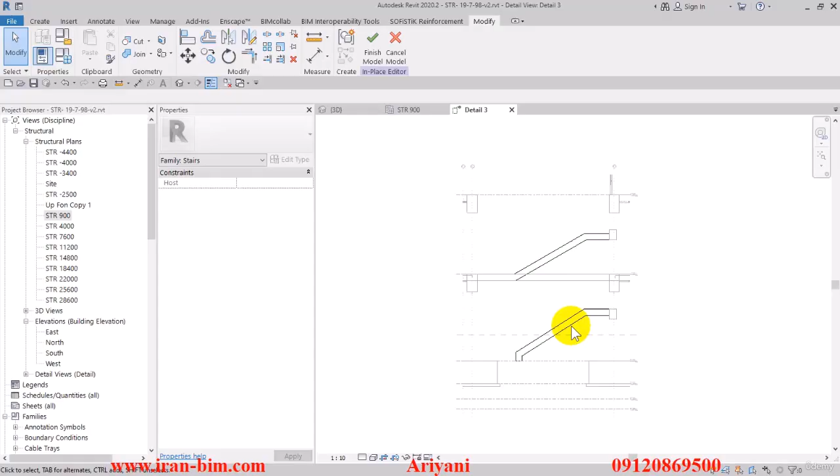I should note that you can model these in different groups as well, but because we're working under one set, we've done them together. So I'll select this, and then using move, I'll bring it right down here. Alright, then click on finish, and then I'll go here and use the extrusion tool, and then I'll set it on the reference plane of the structural level 2.

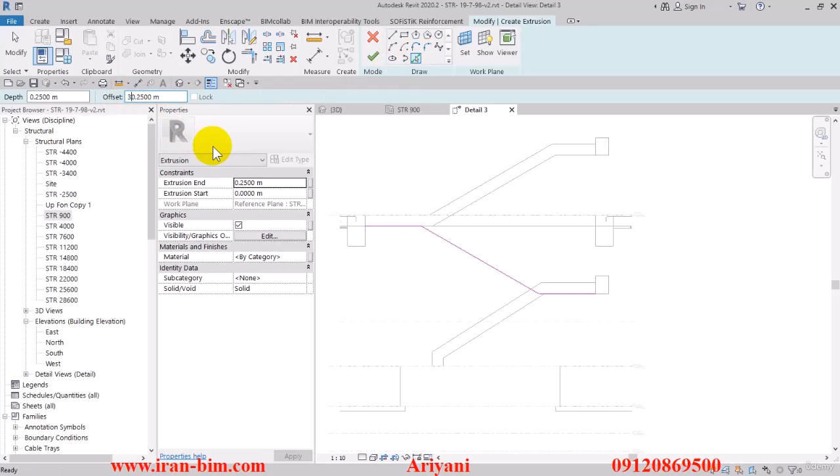Alright, and then draw from this point and type in 1.282. Alright, and then we go up here and draw for 1.271 and connect these two up, and then put the offset on 0.25, and then close the shape like this. Alright, then here put the offset on 0 and close out the opening here, and then select trim and click on here, and then trim these two as well, and then this part as well.

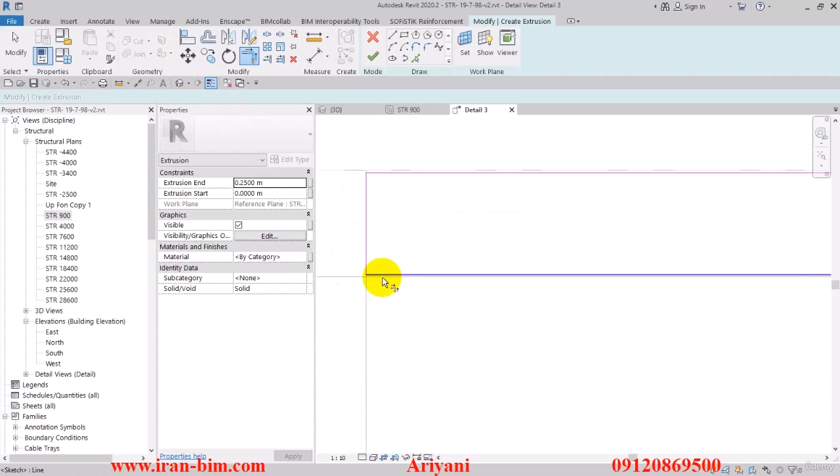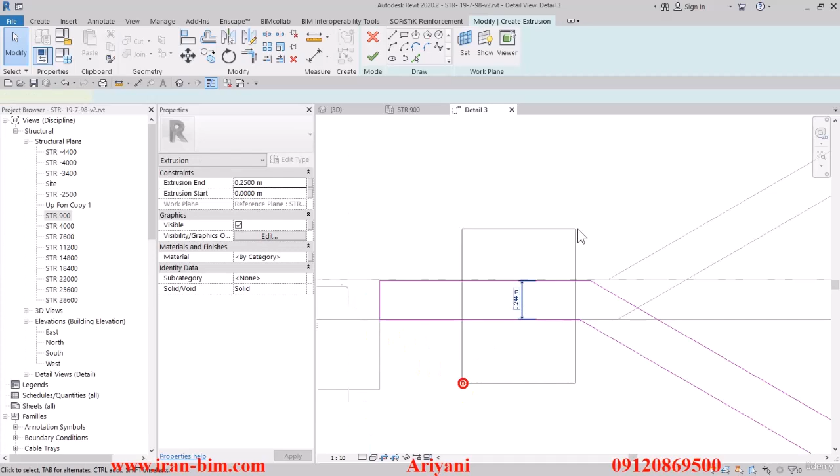Alright, I'll select this, and then I'm going to use measure to see if this actually is 25 centimeters. Alright, select the measure, and then go here, and yes, it's 0.244. So I'll select this sketch right here, then here put in 0.25. Alright, go back and delete this line, and there we go.

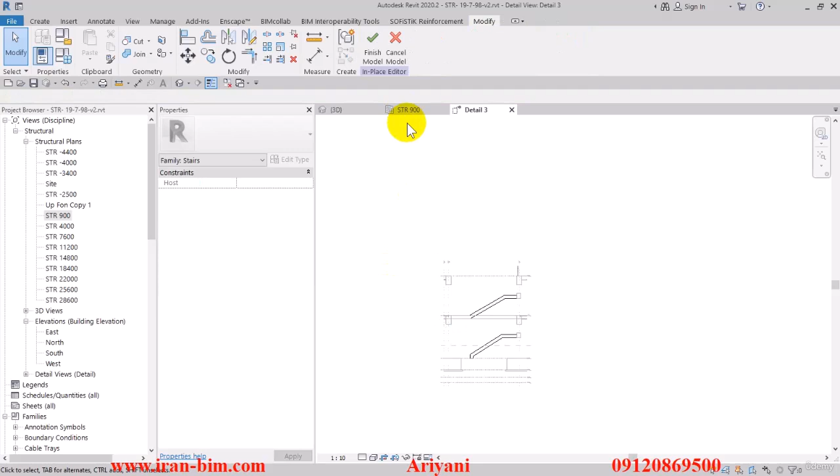So I'll select all of the shape here, and then use copy and paste it up here. Alright, now select copy again, but this time check the multiple box as well. Let me just finish this up for a moment. Alright, click on finish again, cancel, then I'll activate this area and bring it up to this point. Alright, then I'll go back to the plan, then I'll select this, and then I'll connect it to this surface.

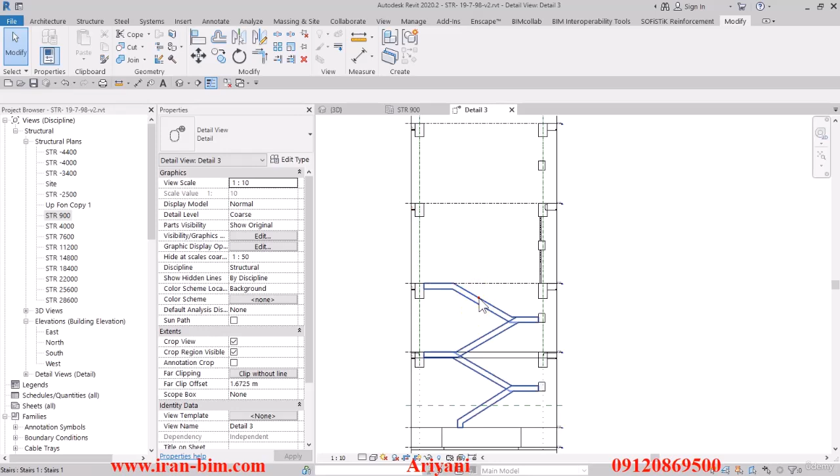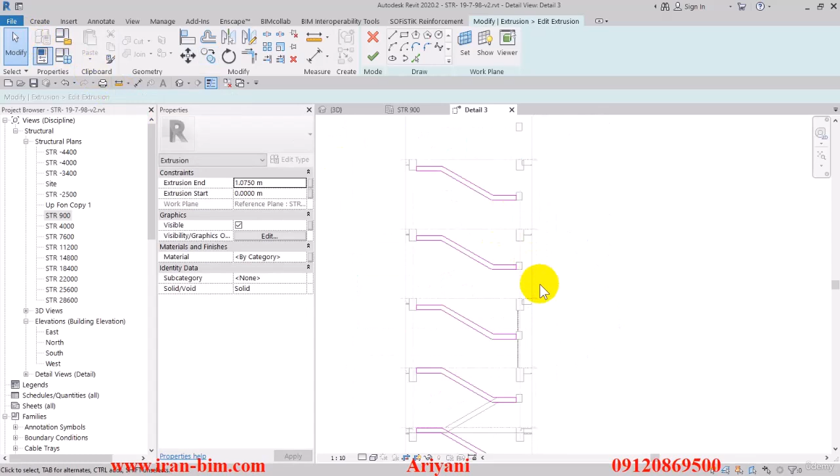Alright, then I'll select the cut line over here, then I'll bring its depth up to here, and then double click on it, and it's right here. Alright, select this and edit. Alright, and then I'll edit this top one here, copy, and then check the multiple box, then paste from here, that goes to here, and then up here, then here as well, and just repeat this process for the rest of it. That's why I said using this method is much easier.

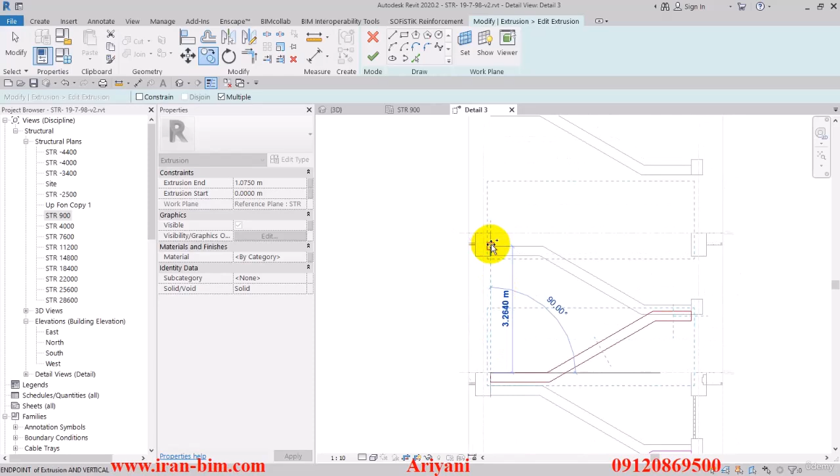Here I'll finish this up, and then for this side as well, I'll click on edit, and then select the copy tool. So this is our main beam. Select the upper point of the beam because the height may be different in different levels. And then go up here and click on this part, then paste it here as well. First, we'll need to edit this part. This part needs to be moved above the beams. If you actually take a look at it, this is the part that we'll need to adjust.

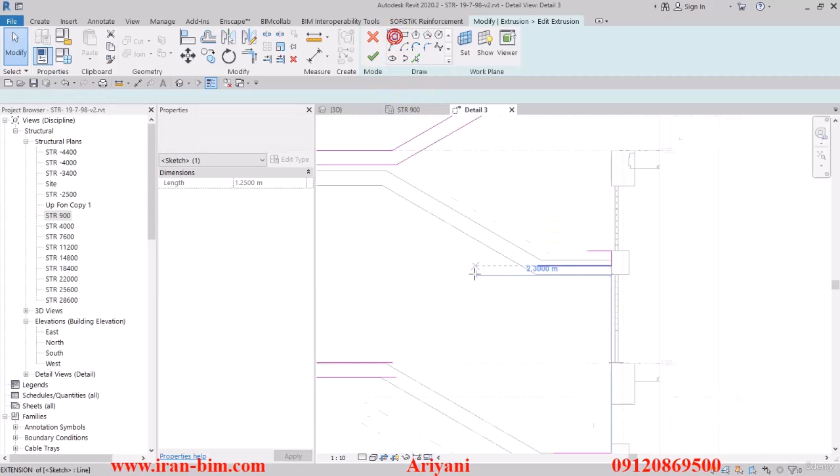I'll select this and use the move tool. Then we'll need to change the length of this part as well. For now, we'll just go with 1.25 as an example. Alright, and then connect it down to this part here. Alright, and then put the offset on 0.25. There we go. And then use trim to complete these parts. Let me just delete this part because we'll have to adjust it later as well.

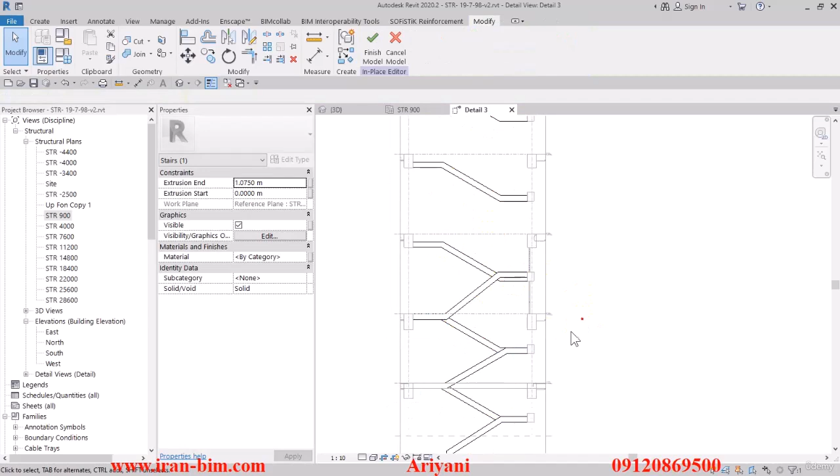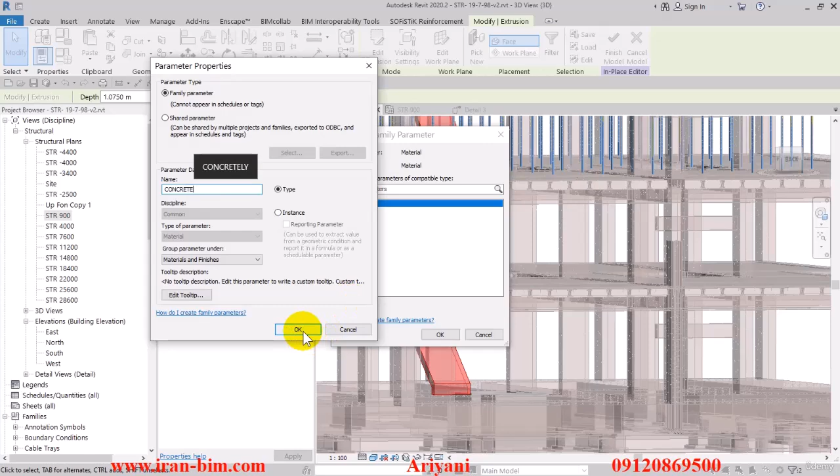So if you fix one of them, the rest are going to be done as well, because the height of these two levels was in order. And we'll need to fix this lower part as well. So I'll complete the rest of the stairs as such. Try to do them yourself too. And then we'll get to the placing of the rebars. Although now that I think about it, I can explain about rebars a bit, and then we'll do the stairs together. So I'll select these two and then give the material from this part, which I'll name concrete.

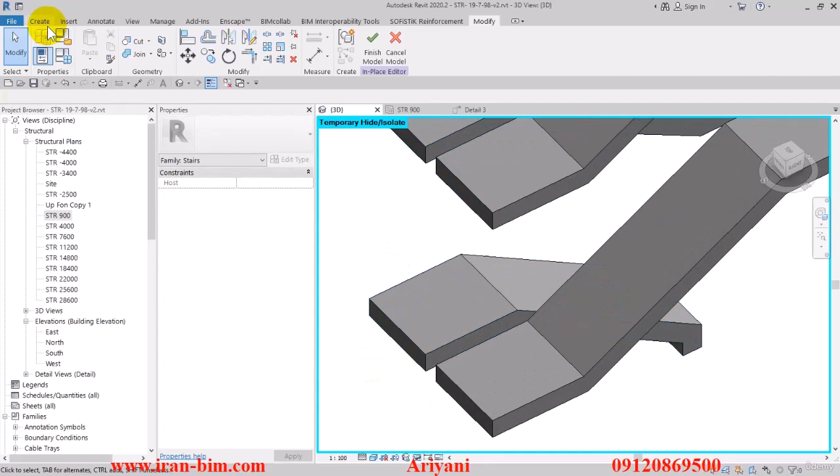I should also state another point, which is about the gap that we have here between the stairs of the different levels. If I go here and select these two and then isolate them, you can see exactly what I'm talking about. This space, this gap that we have here in the middle. You have to do this part separately. Go here and select extrusion, and then you'll set them on the horizontal face of either level. And your base is going to be from here to here.

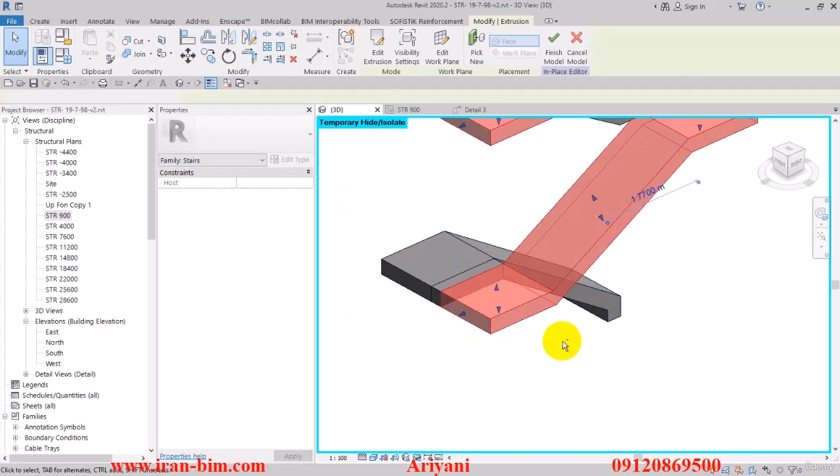So we'll finish this up, and then using a line, we'll connect these two. Do this for all the levels, and if you join them up, you can see the lines go away. And it makes a united staircase part. So now the rebars are going to be separate for this part and this part as well. I'll just finish this up for now and then go to the cut. Then we have a dowel bar here that goes right here.

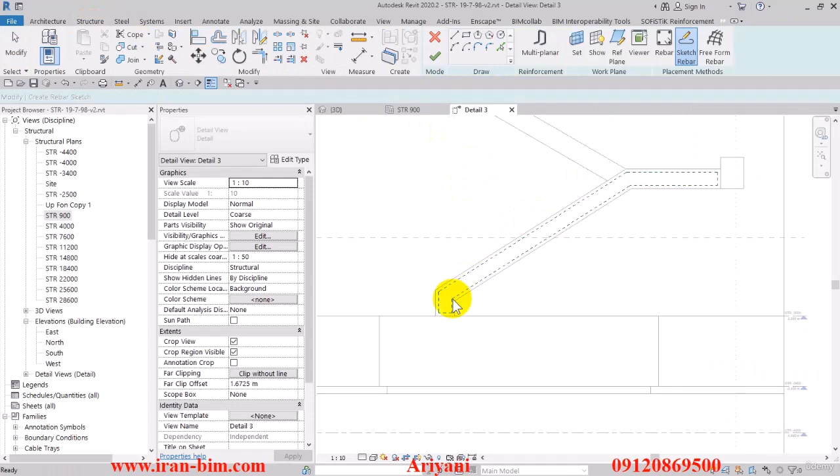So go to the structure tab and select the rebar tool and then the sketch rebar, and I'll click on this part. Alright, so then we'll have the rebar type 14. Select it from the list here, and then we'll go to the plan and draw from this point down into the foundation. Cancel. Alright, then change direction of the rotation hook, and then here is going to be our dowel bar. We'll just put the length on 0.6 for now.

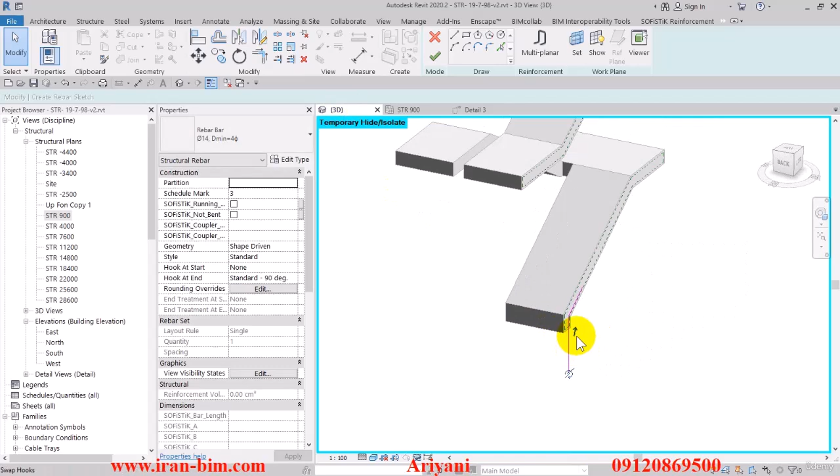Alright, let me just select this and move it a bit higher because we'll have to put this on the main rebar, and we'll place it here so they connect perfectly. Afterwards, we can adjust it as well. So the rotation hook is fine, and if you actually take a look at the 3D, it's right here.

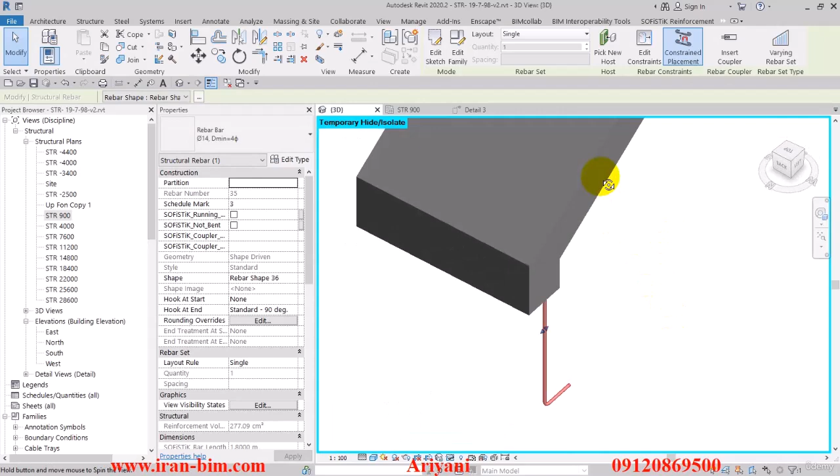So finish this up, cancel, and then from the Sofistik reinforcement parts, select the visibility menu and OK here as well. Then I'll select this. Let's see, rotate it to the top view. Here, let me just move the cut line to the inside parts. There we go.

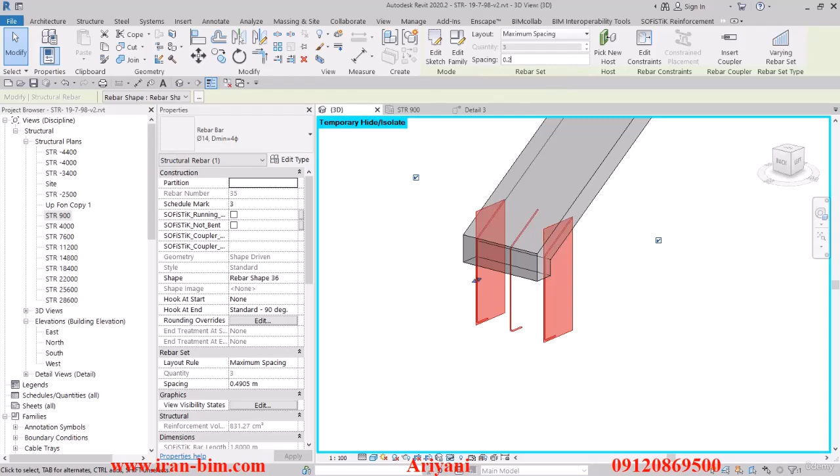And in order to see the stairs better, I'll select it, and from this part, I'll select the override option. And then I'll put the transparency on 50%. And now we can see the inside of the stair as well. So I'll select it and put the layout on, for example, maximum spacing for now. And it's going to be 0.2 meters. There we go. Let's go back to the plan.

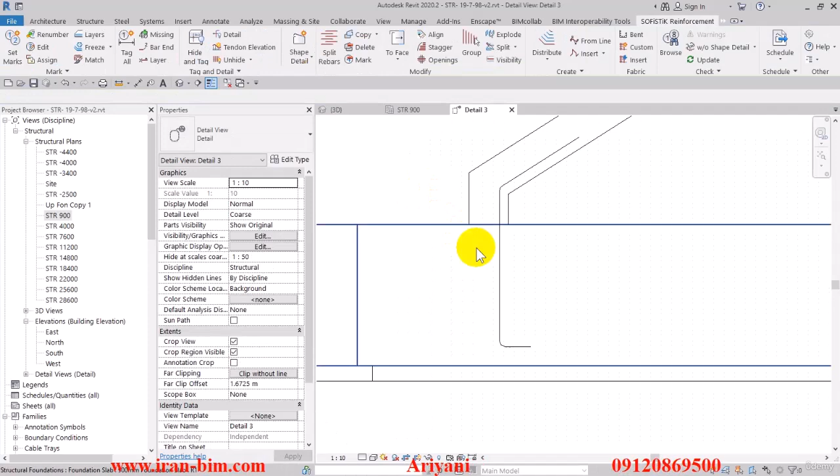And then here we have the cut line for the stairs. Select it. And then we'll move it for about the cover that we have in mind, which is going to be, for example, 5 centimeters. There we go. And then the modeling of the rebar starts from here. So this was our phase 1.

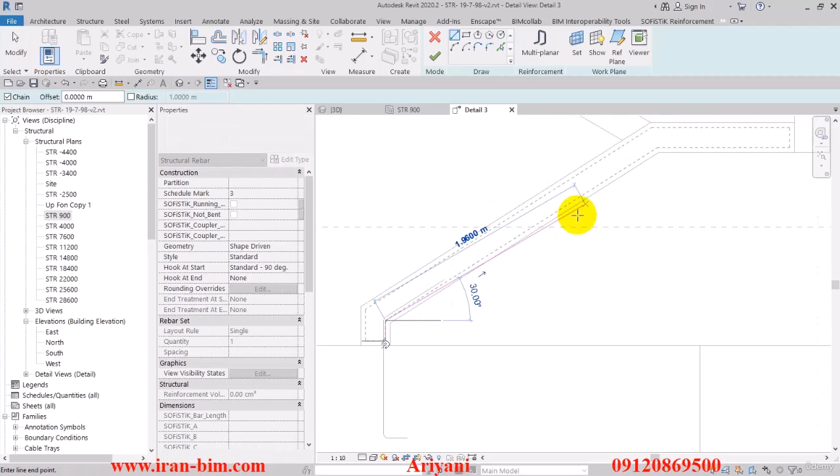Now we get to the rest of the rebars, and in order to do so, we'll go here again to the structure tab and select the rebar again, sketch rebar, and then we'll put it on this surface and start from this point to this point. After that, we go up here and then put in 0.5 meter for this part. Alright, put the hook at start on none for now. There we go, and then we go back to the 3D view.

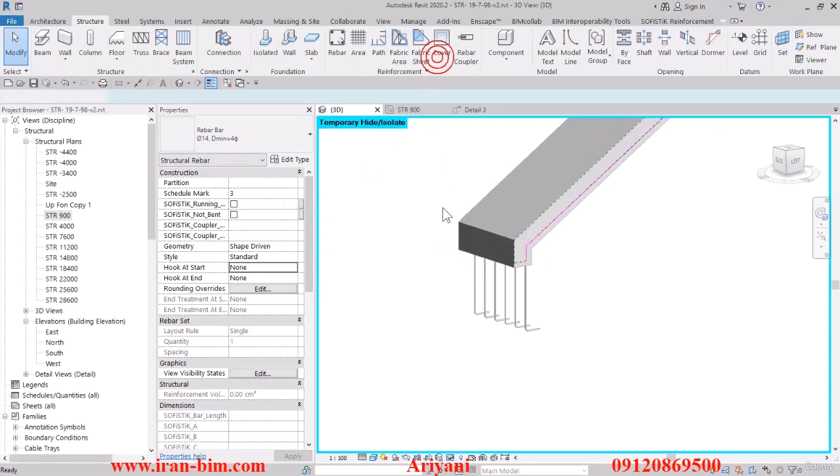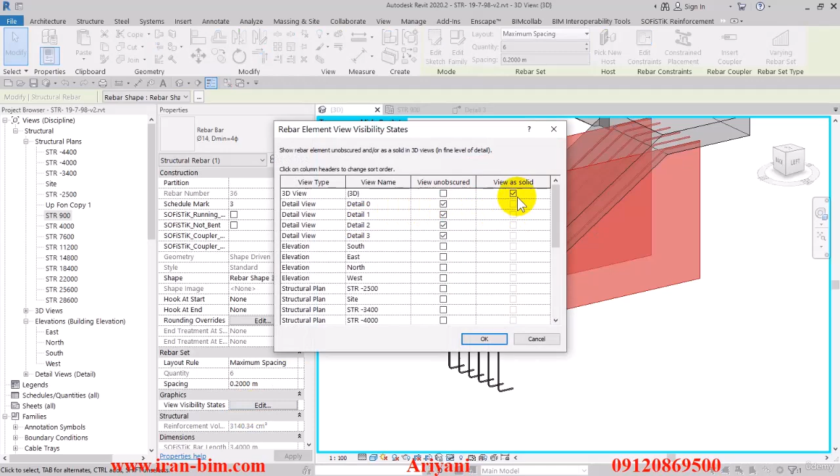Here we've selected the type 14 rebar, so I'll finish this up. Cancel. Put the layout on maximum spacing and on 0.2, whatever number that gives us. Alright, then go to the Sofistik tab, select the visibility and OK. I should note this again, if you don't have the Sofistik tool, you can select the rebar, and then from this section in the 3D view, put the view on solid, and then this one on fine to see it.

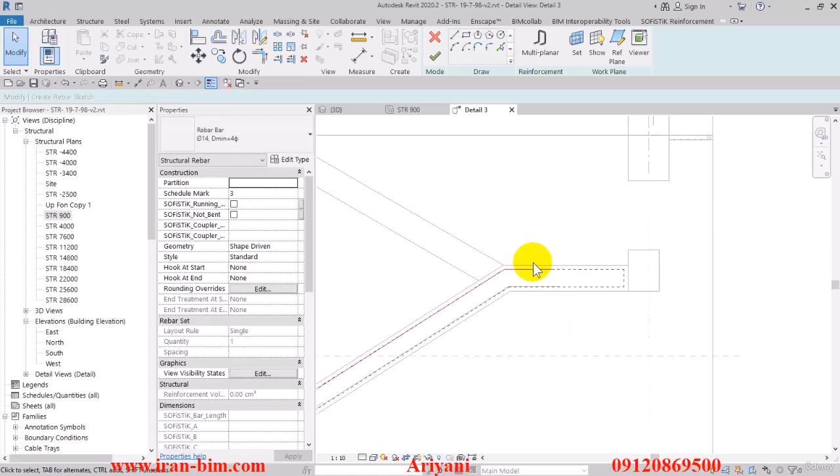So let's go back to the cuts, and then we'll have to do the same thing for the upper section as well. I'll select the rebar tool again, then click on sketch rebar, and then click on this surface. And then we go from here to here, and then all the way up to this part. And for example, give it 0.5 meter. You'll have to do this based on the shop drawings. We'll just do this on estimates for now.

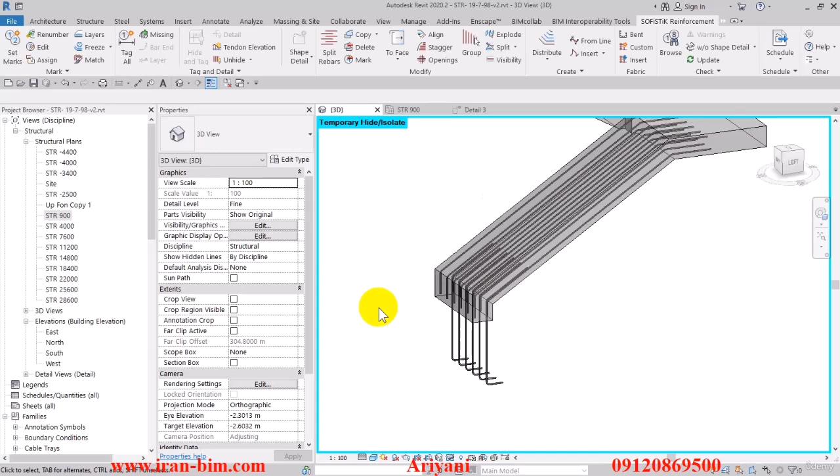So finish this up, then cancel here. I'll select this and put this on maximum spacing as well, and then 0.2, and this is what it looks like. Then I'll put the visibility on. Alright, it's okay.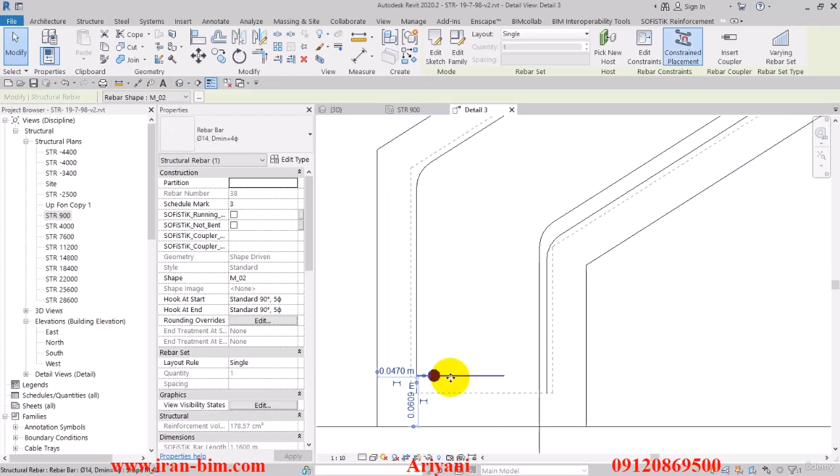So now the rebars that go in the length direction of this, here I'll go to the structure tab and then select the rebar tool, and then we'll go here to the rebars and select this one right here, type 14, and then we have it up here and then here as well. So click right here, there we go. Then go to the 3D view. Alright, here it is. So now let's go back to the plan.

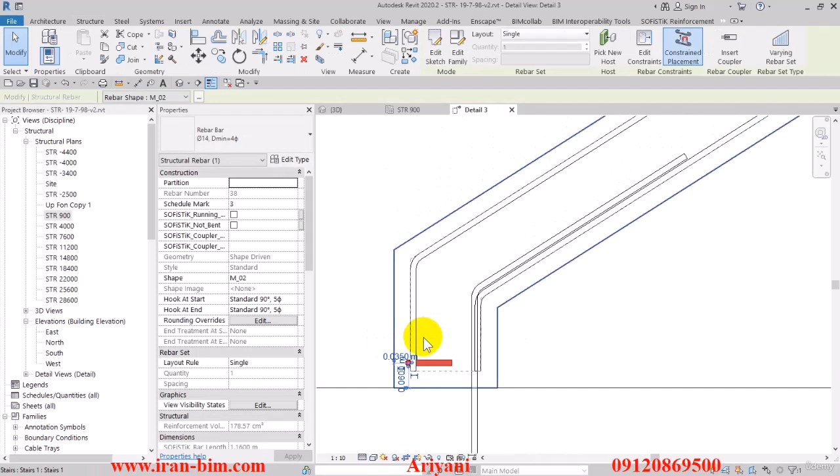Here we'll move the cut line to the right direction a bit, then right click and go to view. Now it's been fixed, so fine. Then we'll select this and move it behind this part. Alright, then put the layout on fixed number. 3 is okay for now.

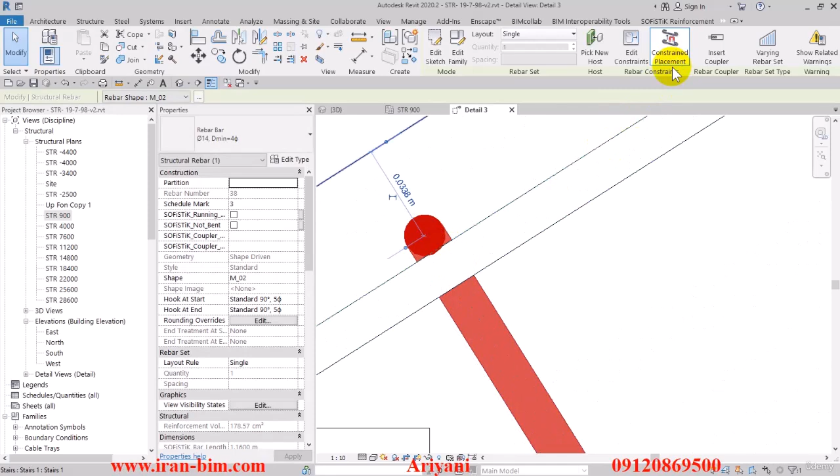So select the create similar option and click here and just move it upwards a bit. Be sure to check the constrained placement option, otherwise it won't connect to the surface like this. This way you can move it and it sticks right to the place that you want it to. Here I'll put the layout on maximum spacing again, and it's going to be each 20 centimeters.

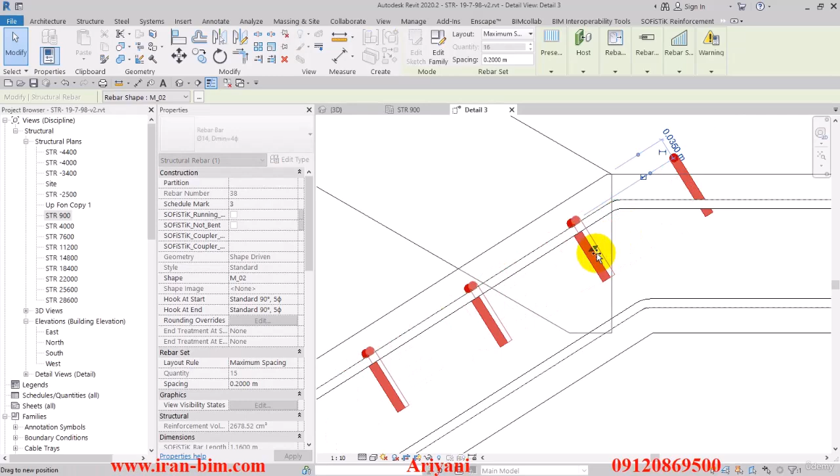Alright, then we'll select them and move them up a bit because this part does conflict. Alright, and then from this part we'll move this down a bit right to this point. We'll just repeat this for the underside of this as well. Here visibility is fine, so click on OK, and there it is.

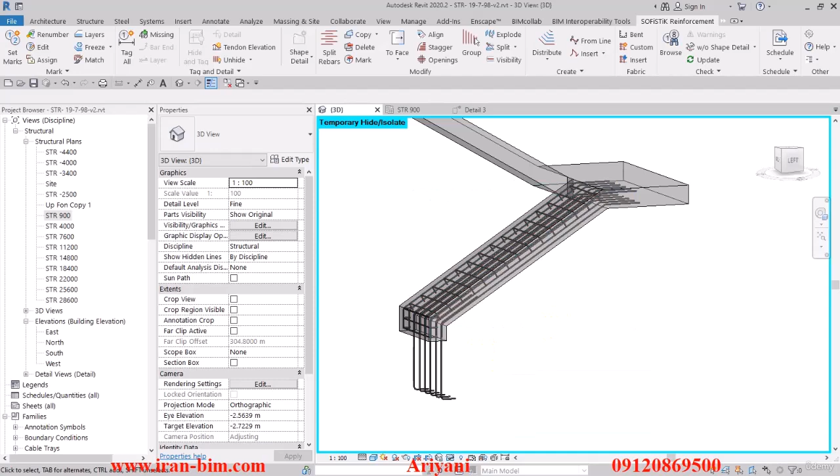So just like this order, we'll go through with the rest of the pile, the beam and the column and do the placement of the rebars as well. The placing process is no different than this. You just have to go according to the AutoCAD file and then cut up the different places of the plan and put the beams, no matter if it's in the columns, in the pile, or whatever.

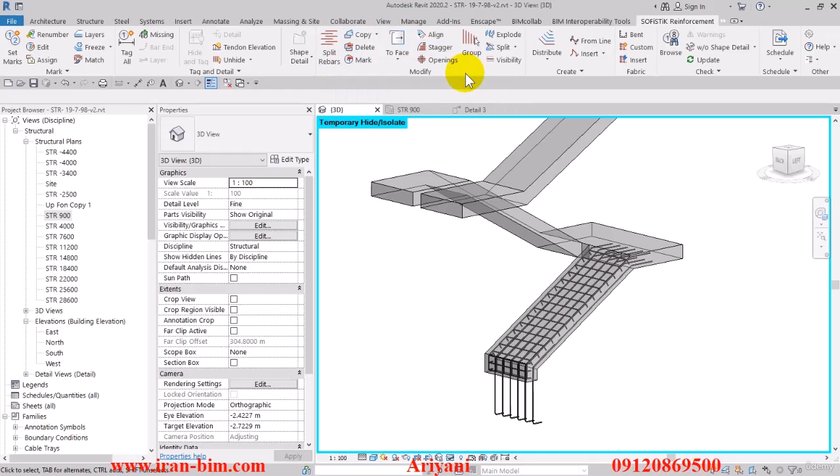Doesn't make any difference. So before you do this in the rest of the plan, I'll give you some explanations using the SOFiSTiK tool and the modeling in that part. For example, the split tool, which can help us a lot when we're doing the rebars in the pile. And then we'll do the rest of the rebars together.